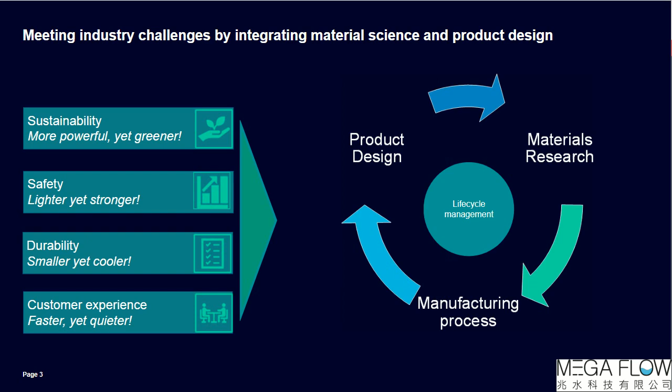So we have a tale of two. There are more barriers in this whole value chain, but I will not talk about all of them—I will just talk about the gap between chemistry and engineering. In chemistry, one can think of questions like: which ingredient has what function, what intermediate step is necessary to reach a final product, and so forth.

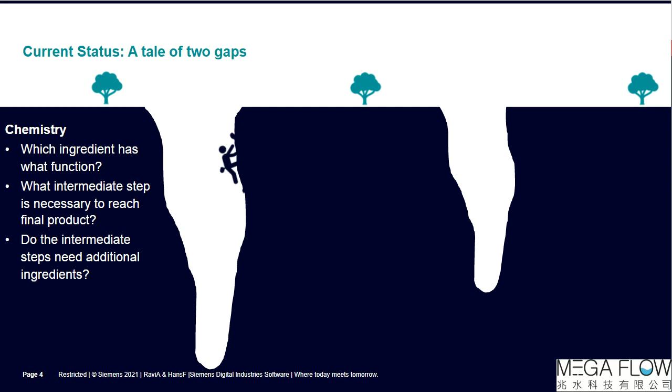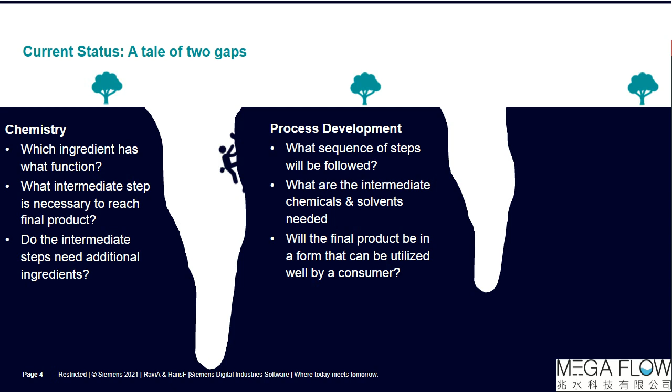In engineering, one has other questions. In process development: what sequence of steps will be followed? What are the intermediate chemicals and solvents needed—very important for process engineering. And one can also go into scale up: what scale up rules to follow? Are the intermediate ingredients and solvents environment friendly, and so forth? And of course, will you make money and deliver on time?

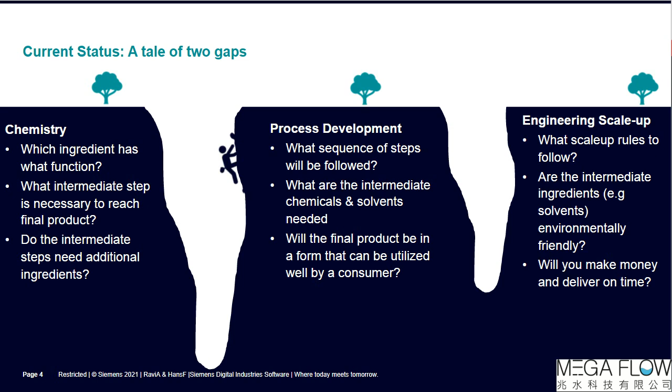Now, there are two gaps here, maybe not very familiar to the chemist, but in engineering this is very well known. There is a considerable gap between process development and engineering scale up. Within Siemens, this has been recognized some time ago, and there are lots of methods within the Siemens Simcenter portfolio to deal with that issue. I will not talk about them today.

I will just briefly mention computational fluid dynamics, CFD—we will be talking about that quite a bit. So we were talking here about the first gap, that between chemistry and engineering, and this is, in a nutshell, what this is all about.

This is a picture of a typical way that, nowadays in laboratories at many chemical, pharmaceutical, and personal care companies around the world, new materials are being developed. In the center of the whole setup is a robot, and the robot does many experiments—let's say maybe 1,000 a day or something like that. Usually that robot is surrounded by maybe 10 people.

Now that robot is fed by a person coming up with an idea, the product design, which can be based on all kinds of input from the market—we will not talk about that, that's a very difficult step, a different seminar altogether. Then there is computation going on, which can be molecular modeling, AI, design of experiments, something like that.

But if you look at this whole picture, there is actually a very slow step, and the slowest step in all of this is not the robot, but going into engineering. In a typical company, we know of some personal care companies that do maybe 40,000 formulations a year—that's actually more than 100 a day. And this is, for just one robot, a lot of information.

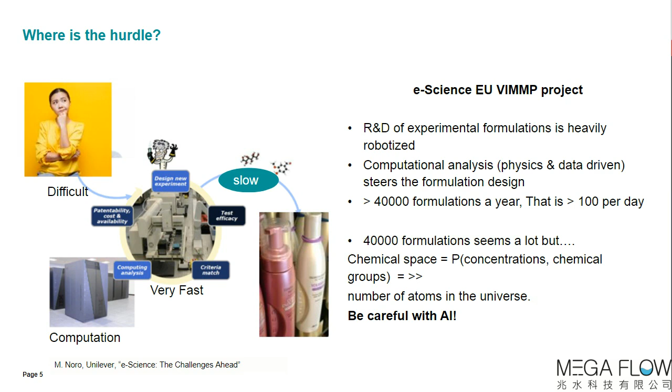This is why we want to go to physics-based modeling. Even though you generate a lot of data in early-stage discovery, that data is still limited compared to what you need for a full-blown AI. There are other areas where this is different, for example in protein structure prediction—we'll come to that in a moment. But in formulation, the possibilities are endless.

So if you want to do computational materials discovery, you want to be able to screen your new materials at the pace of the robots in your laboratory, similar to pharmaceutical design. You need to include thermodynamics, because you want your screening to tell you if your product or process is stable, or if your product is stable enough to survive the process. You also need to include rheology, because one of the most important aspects in scaling up these complex formulations is the rheology—the viscoelastic behavior. This will come back a few times. Viscoelasticity is way more complex than thermodynamics, and the more insight you get into that early on, the better, to speed up the whole value chain. Remember that.

To make it even more challenging, in many modern formulations—maybe not batteries or liposomes, but many polymer-based materials—one includes reactions and phase behavior, simply because that's a lot less expensive than doing it the other way. Doing experimental screening with robots with reactive formulation is extremely difficult, impossible. So the short message: if you want to speed up the value chain for these complex materials, you may want to use AI, but you better also use physics-based, coarse-grained, and mesoscale models.

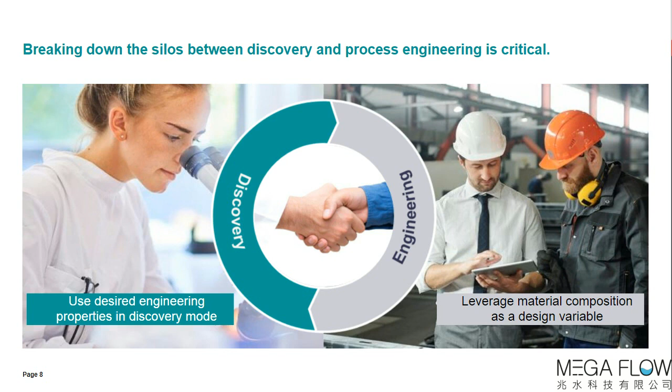The vision we have is integration and digitalization. What we need is really a handshake, a marriage between chemistry and engineering. The engineer should be able to say, can we use the material composition as a design variable in the process? For example, what happens if you change the solvent—would it affect the material, or how would it affect the process? That's a chemistry question. On the other hand, if the chemist can include engineering properties in discovery mode, as we will see, that would greatly aid in speeding up the value chain. So you need a handshake between the two.

Now the solution is, as we'd say, unity in diversity. Within Siemens there are many different software tools available for lots of stuff, and this is all about unity in diversity—how you get them to work together. There's a very important social, cultural, and historical element to that. I'm from Leiden University, a classical university, chemistry. Nearby is Delft University, a technical university, that's engineering. And it has always been like east is east and west is west. This is fine, we can survive like that, but not in the 21st century with all the challenges we have. So we need to figure out how to cross this valley.

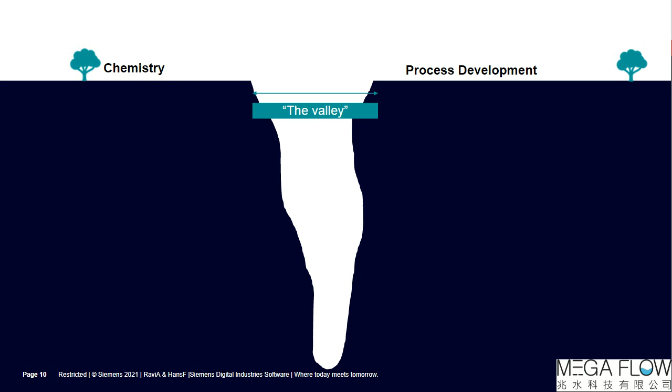I'm not going to talk about all the social aspects of this. I'm going to talk about the one aspect that we can solve with the current tools, and that is algorithms.

This valley translates, from an algorithmic point of view, into the valley that exists between left-hand chemistry scales—quantum, molecular, coarse-grained, discovery—and the right-hand scales of continuum mechanics, even the scale of equipment, going on to the length scales of the entire plant.

On the right-hand side, continuum, equipment, plant—that is the standard classical Siemens territory, right? This is process models and engineering. Excellent, they can work together. They have been used in many different applications.

Very useful. On the left-hand side, we have a whole range of methods that take information all the way from the quantum to the mesoscale, which then acts as a bridge crossing over to computational fluid dynamics.

It is not always necessary to really go into a mesoscale simulation to cross over to engineering. There are also a lot of examples where you can take, for example, a quantum-derived structure and put it into a thermodynamics that goes into distillation columns.

So that's from the right to left. We have examples of that too in a moment. But overall, certainly for structured materials, we need to go all the way from quantum to meso, and then to the continuum, etc.

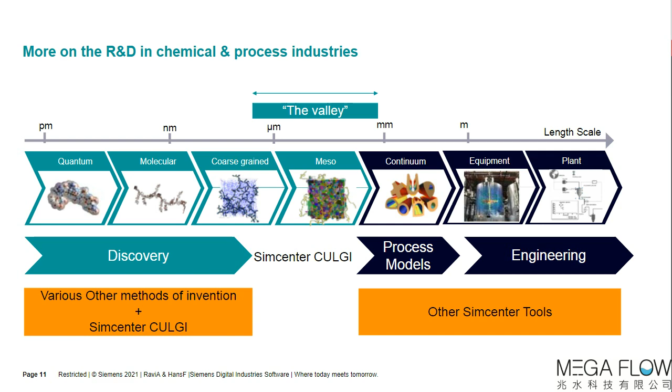So that was the grand vision. Let's now go through the reality of algorithms and how it works in practice.

Here again, a short overview of the typical questions we get when we talk with customers. A very important question we often get: can you predict the shelf life of this material? Or was it a phase diagram? Or can you predict the viscoelasticity and stuff like that? I guess most of you will understand or know about these questions.

So what properties can we now estimate with Simcenter Culgi, given the context we work in? We were talking about constitutive equation formulations with a novel algorithm—we talked at length about that. Then I will also talk about partition coefficients.

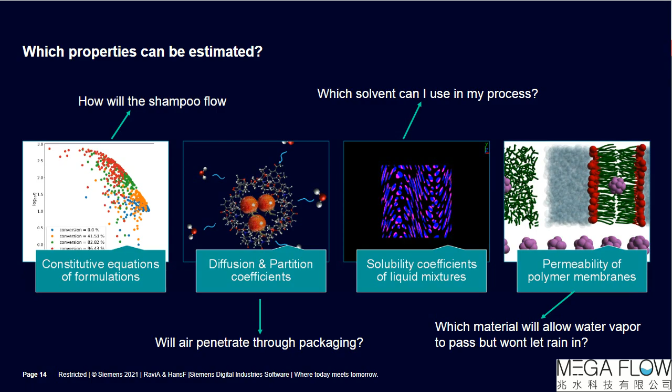Let's skip that very fast and go to the first topic: partition coefficients, permeation coefficients, stress-strain relationships, and phase behavior. And of all that, partition coefficients first.

Partition coefficients are something you find all over the place. You have a mixture of something, and an active ingredient, and it partitions in your process or in your final product between phases—what is the fate of that?

Can you predict that? Now, one needs to recognize that the world is changing very fast because of sustainability—we're moving away from petrochemicals. In the old days, not so long ago, this question might be answered by some kind of QSAR based on petrochemicals, and there's lots of data available in various databases to calibrate such a QSAR.

Maybe you would call that now AI. But this is not what the future is telling us. The future is telling us we want to use much more complex, large molecules—molecules that are almost like nanomachines that can do some clever stuff.

And if you want to predict the fate of those molecules, you really need to go to the quantum description of those molecules. You can no longer use group methods or descriptors that you would use in AI. It's impossible—you don't have enough data to calibrate that.

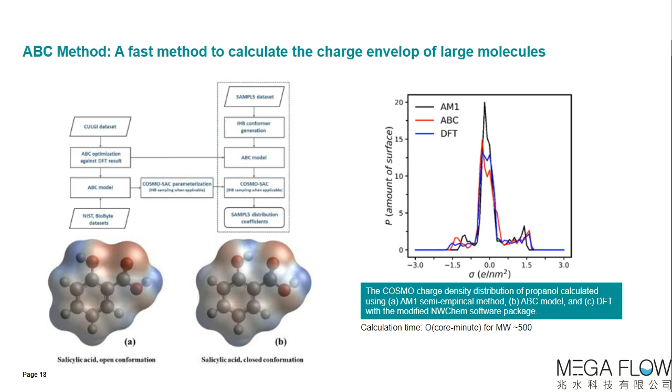With this ABC method, we can now suddenly calculate the partition coefficients of even large molecules in just a few minutes, and this means any type of molecule. So there's no limitation on groups or whatever.

The same as in any quantum method. On the left, this is published work, if you want to see that in more detail you can look it up. This is partition coefficients taken from the BioByte database, a large collection of that sort, and we got actually a very good result.

We then tested the calculation method on calculated or measured partition coefficients of very large drugs going into the SAMPL5 set. That's a challenge - the experimental value is on the horizontal, and the calculated one is on the vertical. We actually beat all the competition, and we also beat Klamt himself, which is something. But Klamt himself also beat all the other competition - force field methods, engineering thermodynamic methods, and so forth. So we have a method here which is faster, more accurate, and can be applied to any type of molecule.

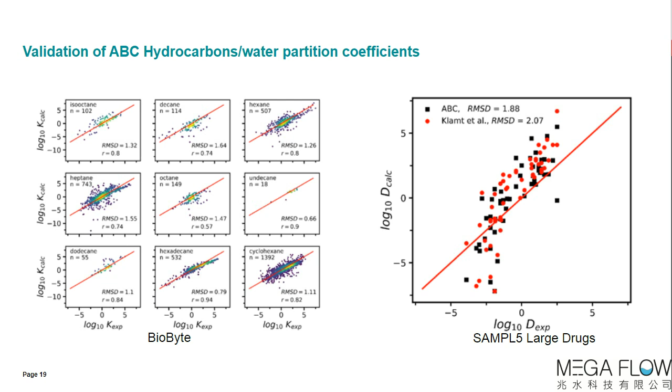The method is also not limited to hydrocarbons at all. Because of the nature of the quantum calculation, you can actually use it for any type of solvent. So let's see an application of this immediately, because partition coefficient between hydrocarbons and water is maybe not that - it's nice, but okay, what do you do with that?

Where this method comes immediately into place is in membrane permeation coefficient predictions. This is again a very important topic. I will talk about it in a moment, but first I will talk about the coarse-graining nature.

This is what you do when you have an inhomogeneous phase. What you just talked about, partition coefficients, is between solvents - these are homogeneous, so you can do a quantum calculation with your solvent and do equation-based thermodynamics. Very nice. But now we go to structured phases, as you would have in batteries, liposomes, etc., or membranes. And then you have things in 3D, and you can no longer do this homogeneous trick - you really need to represent the 3D.

Since we are aiming for a screening speed - remember, a few minutes or hours per system at most - then you need to coarse grain the molecule. There's no other way around that. But the coarse graining needs to be done with two constraints. First, you need to be able to represent any type of molecule by a coarse graining procedure in an automated way, because we want to do everything automated by theory. The second is it has to be thermodynamically accurate.

So we do a trick: the structural information comes from the bottom up, from left to right, and we use ABC to get the quantum envelope. But the thermodynamics we do from the right to the left - we take from engineering thermodynamics, and apply that to the beads or blobs, or whatever you want to call them, the coarse grain units in your molecule. All of this is automated, and also being published.

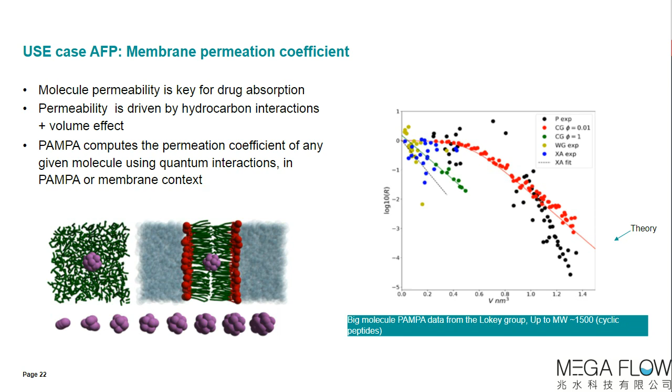Let's go to a different application. We will talk a little bit between application of pharma and materials. I hope you will appreciate that. This is also a very important, very timely topic.

We all know about AlphaFold that is used to generate structure from our friends at DeepMind, a very impressive piece of work using AI based on all the structural databases we have for proteins to come up with a structure. Those structures are not maybe good enough yet to do small drug discovery, but it's more than good enough, as we have discovered, to connect with coarse graining and to say something about the formulations or the aggregation behavior of those molecules.

So what you see here is one example we have been working on, and since AlphaFold was published just a couple of months ago, you understand what an enormous amount of work my team has done to make this work in a very short time. But because of automation, we were able to do that.

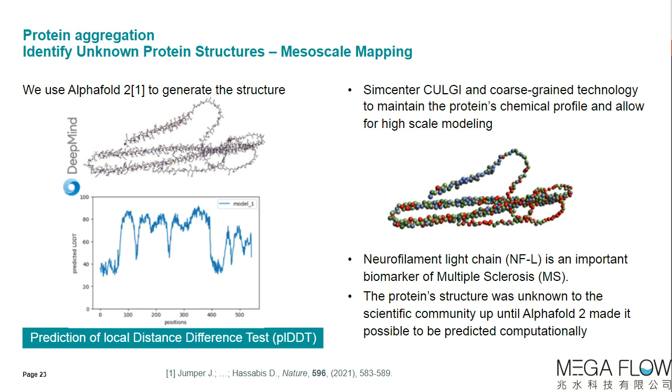So we take the structure from AlphaFold generated as is, then we feed it into Simcenter Culgi. We do our automated coarse graining technology, maintaining the protein's chemical profile. We come up with a coarse grain structure, and we dump that as is, without any further adjustment, into a coarse grain simulation environment. This is, I believe, DPD. We will also talk about another simulation method at the moment.

And then we calculate the aggregation of the molecules in water. And what we see is at low concentration there's no aggregation, and at 100 nanomolar concentration there is. This is a protein for which, until a few months ago, nothing was known. So out of the box, we predict here the aggregation behavior of a molecule, which is very important for a disease like multiple sclerosis.

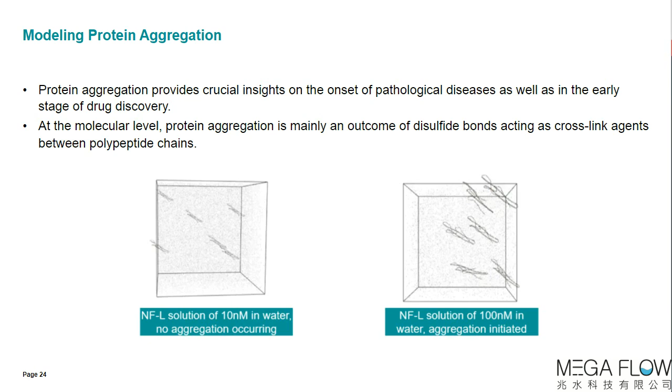So I think this is amazing. I did not do the work myself. This is a person working in my team, Panos, Petris Panos, but it has a lot of future. So we also now apply that to antibodies and to vaccination and so forth.

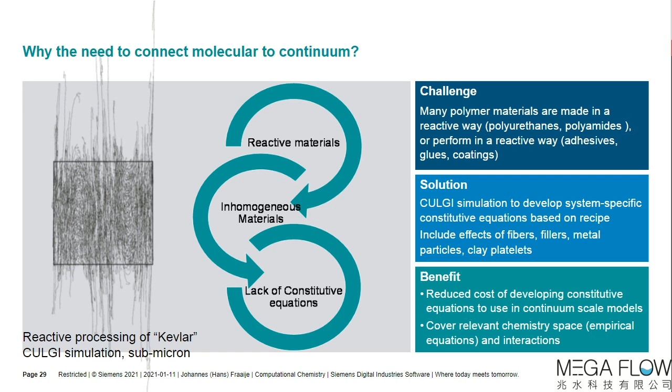These equations you'd be able to use, like the PTT model I just mentioned, will easily take tens of parameters, and the time needed to parameterize those equations is really months. This is the reason scaling up is so difficult and time-consuming. So we need to bring a lot of that back into the discovery phase through digital means, through a model.

This is a bit of a funny slide, perhaps. The first case we'll discuss is polyaramide, also known as Kevlar in the United States, or in Europe maybe more commonly Twaron. But the short story is this: we start all the way on the left with the monomers—aramide solution, aramide monomers.

Then you scale them up, you make a coarse-grain model of that, and you do some shearing, and then it goes into the fiber. The fiber goes into a kneecap, like what you see here, and the kneecap is used in protective clothing. This kind of stuff is used worldwide in many different applications. And then finally, you can use it for thatching a roof—actually, this is my own roof, my own house here in the Netherlands.

Very nice work, I must say. There are also a lot of stories to tell about that. I don't have time for that, but if you want to thatch your own roof, you can contact me.

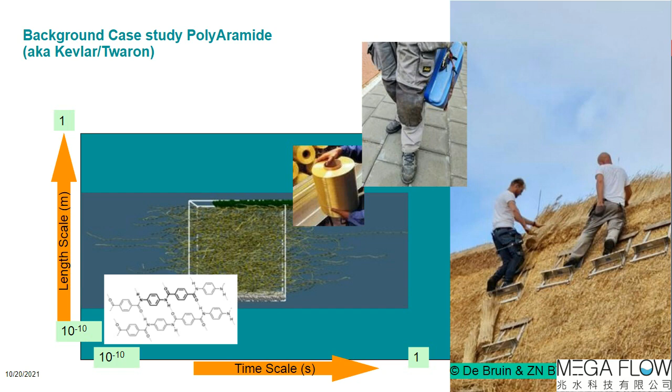Then we have here quantum-derived structures. So how do we do that? We take what we just said. We start with this ABC method to coarse grain or to get the quantum envelope of these monomers. This is here an oligomer.

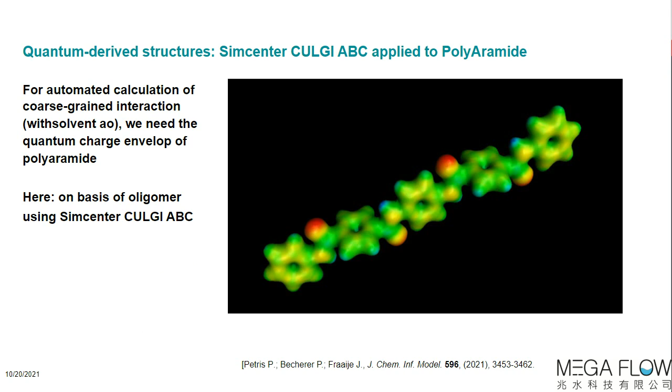And then we use the AFP method to set the coarse graining of the polyaramide. We take here rough setting.

AFP by itself has a scoring function where you can set many different meta parameters, like how many heavy atoms you want per bead, or whether you want to maintain rings or not, or the volume, or the surface. There are many aspects you can set at the scoring function.

It's like simulated annealing. We have taken here a very simple setting: we will do 6 atoms per bead. Again, all of this is automatic.

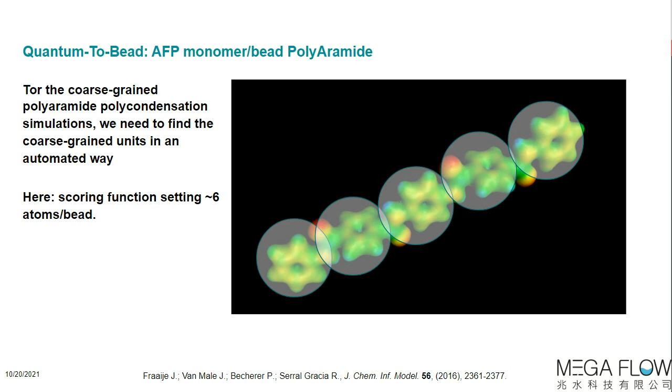And then we go into rheology, microrheology. So we put the whole thing, the monomers, into a small simulation box, and we turn on coarse grain simulations. And now we use a method called Stokesian particle dynamics.

This is not DPD, dissipative particle dynamics. It is also not molecular dynamics. It is also not Lattice-Boltzmann or smoothed particle hydrodynamics. It is something new. It is called Stokesian particle dynamics.

In short, what SPD does is take the same principles as DPD, but with one very important change: we have removed all inertia. Why did we remove all inertia? Because in this domain of submicron flow, that is creeping flow, which means no inertia.

This is again something that when you step over to computational fluid dynamics, you will understand immediately. Now this SPD dynamical method has been modified a little bit, and we have added kinetic Monte Carlo, which means that we can now do coarse-grained reactions.

The calculation you are going to see takes about 2 core days, so that's still on the level of screening. If you have enough cores available, you can try many different recipes. Maybe not core minutes, but core days, I think for such a complex problem, is already very fine.

And then the fun thing starts when we realize that because we can measure stress and velocity, we can actually calculate the constitutive equation from a single simulation. So for a simple liquid, the constitutive equation is simply Newtonian, this viscosity here.

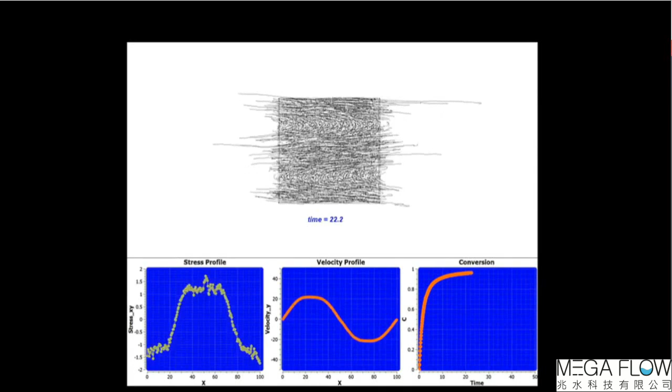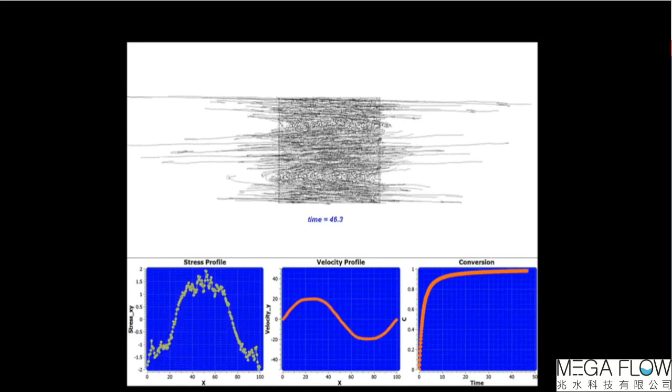That went very fast, but already after maybe 40-50% conversion, it started to become this much more flattened envelope. And at the end, after 90% conversion, you will see you have very long polymers. And as in polycondensation, this is very heterodispersed - you see here these long polymers, but you also have much smaller polymers.

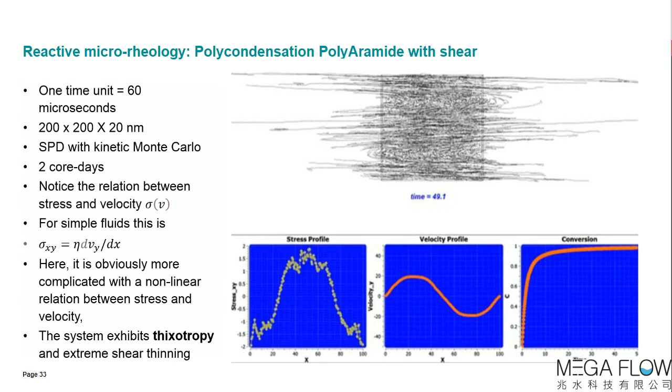And what you have also seen is that it's like you have extreme shear thinning, and in the middle it develops almost like a plug flow. So you have thixotropy, you have shear thinning, you have the whole rheological spectrum from any textbook, in one simulation. And it's really amazing. Okay, we will come back to that in a moment.

Let's go to polyurethanes. If you want to make polyurethane, you need at least two polymers, plus additives, and there's a very wide selection of chemicals. The isocyanates and polyols, each of them you can select from hundreds and hundreds of different chemicals the industry provides, and this leads to an extremely wide variety of material properties. You can almost see it like using amino acids for making proteins. Very broad applications, so three applications stand out.

We have been talking a lot about business to business, what happens in the industry, in the process, in the value chain. But there's another application where you do reactions in-house as a consumer, like when you make your own coating out of PUR. You can buy that stuff, and then make your own coating, very strong, very stiff, but these have very particular rheological properties because you don't want the stuff to form a hard coating while it is still flowing. So here too you have lots of competing demands.

Other application, reactive injection molding, where there is basically nothing that can say something reasonable about that. And there's also foams and construction materials by itself, also again a huge area, and I really don't have the time to talk about that.

So today we talk about the molecular level all the way to coarse-grained level, and we will do the same as with the Kevlar stuff. So we have the monomers in a simulation, and in this particular example, only two of them, one polyol and one isocyanate. We have some parameters for the kinetic Monte Carlo, and here we go.

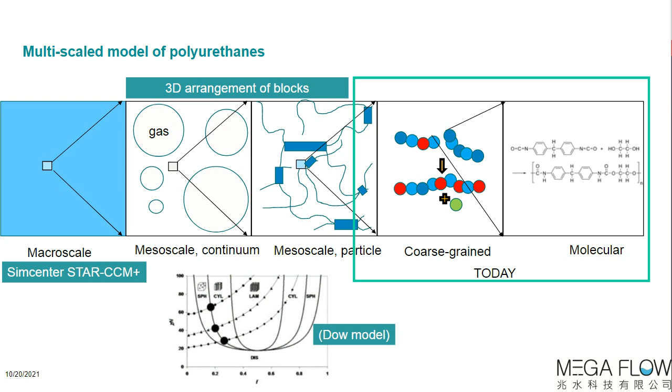Then the same as in the Kevlar, we calculate the stress and the velocity profiles in the system. What you saw in the Kevlar, these plots of stress and velocity, the two of them, as I said, is what you need to get a constitutive equation. So you can formally define an effective viscosity simply as a ratio of the stress and the velocity gradient, the strain rate, that's the gamma dot here, which you can actually calculate from the gradient of the velocity profile.

So supposing you have done an accurate enough calculation without too much noise, then you can actually do this as a function of conversion. What you saw in the Kevlar, conversion went on, and we only showed the video, but for each snapshot in that, you would be able to do that. This is what we have done here in the PUR case, or polyurethane case.

So now as a function of conversion, look at the blue, here the orange, and then the green, and then the red. Here on the horizontal we have the log of the shear rate, and here the log of the effective viscosity. You see that as conversion proceeds over time, the viscosity goes actually sky high, which we expect. This is also what happens here because this forms a network, so the elasticity also changes a lot. I'm not going to talk about that here today, because that would mean a different webinar altogether. But this is very interesting to be able to calculate that too.

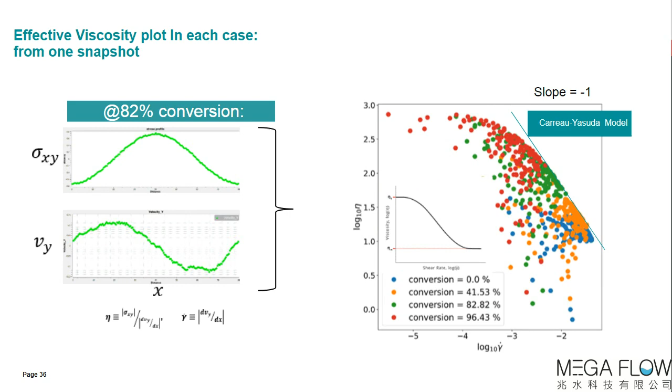It just says, okay, when you have a low shear rate, you have a plateau. When you have a large shear rate, you have a plateau, but that plateau is lower because you have the shear thinning, and you draw something in between. That's basically the Carreau-Yasuda model. But you see here, it comes out of a simulation, and the only thing we need to do to change this, or to modify this, is to change the recipe of the polyurethane. So suddenly we have a very important link between molecules and, until now, a purely empirical model. We believe this will certainly speed up the value chain.

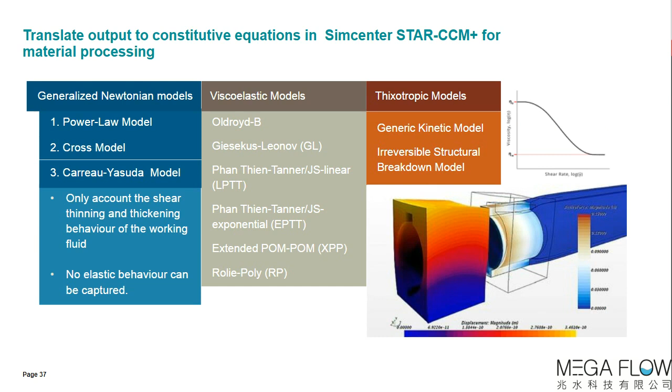Which brings me to the last couple of slides. I did not talk about the software too much.

I assume most of you will be experts in some way or the other, so you will have seen molecular modeling interfaces. We have the same type of interfaces everyone has, but we have one big difference. Since we are focusing on very complex formulations from the inception of Culgi 15, 16, 17 years ago, I made a very conscious decision that instead of focusing on a graphical interface where you would design, which we have too, of course, like everyone has, really the workhorse of what we do is writing scripts.

These scripts we write in an integrated development environment that we created ourselves, but we can also export that to Python. And the Python environment gives us the possibility to connect to all kinds of other software, so we have a very open data structure. For example, connection to AI is now almost trivial.